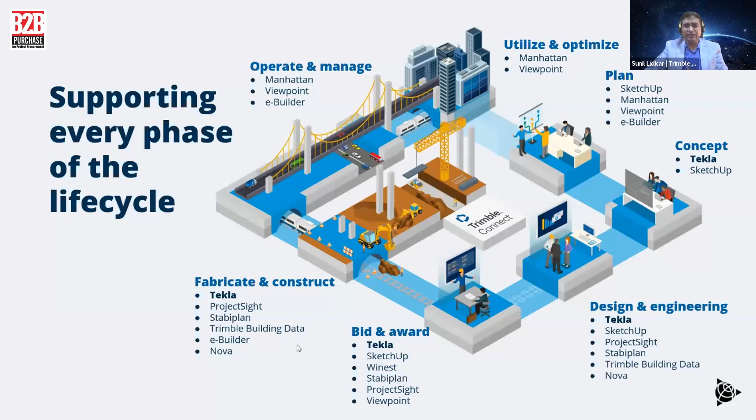And what we do: we are into operate and manage, utilize, plan, concept, design and engineering, bid, fabricate, and construct. So if you see, the role of Tekla starts from concept, design and engineering, bid and award, and fabricate and construct. So that's what we will be discussing.

So let's go through what we have in terms of Tekla solutions. For Tekla solutions, engineering divisions, engineering organizations like EPCs, pre-engineered metal building fabricators, or a fabricator like JSSL, are our customers. We do design analysis, concept design, and detailing. Construction companies are also one of our biggest customers. Likewise, the detailing and fabrication industry, which is more prevalent in India compared to other parts of the world - if you name the major projects in the world, I'm sure most of the detailing is done in India, engineering and detailing for sure. And to support this, we have a very good foothold in the education industry as well, because we need good manpower capable of delivering tomorrow's projects.

So we deliver truly constructible models, that is with LOD 450, which is level of development. So that model will carry more and more details, covering the whole structural workflow and structural BIM for all materials. So material and workflow is managed, and we have an open BIM approach.

Let's say, for example, if you want to collaborate with a third party BIM or 3D model, we can do it very easily. We have that capability to seamlessly adapt to various machinery, MEP, or any other 3D model. So before starting the fabrication or construction process, we are well aware if there are clashes, and we can take measures to avoid those clashes. We have the model, and we can take it to the field through AI, AR, and VR as well, because that's the upcoming trend we have seen in the industry, and collaborate efficiently with all of these without any data loss.

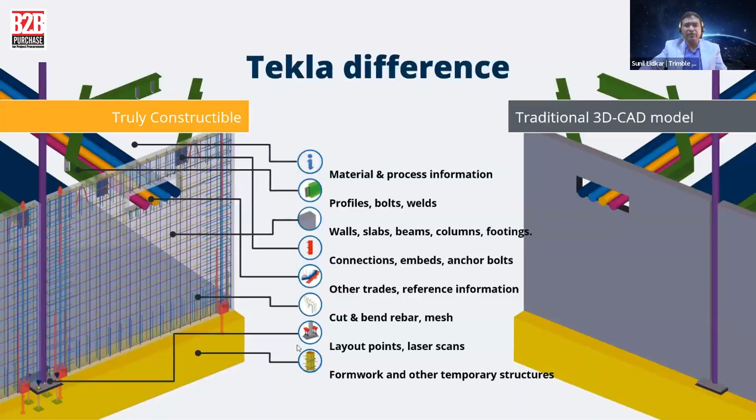We are talking about a BIM model. BIM is not just a model, not just a block which we are building, but a data rich model which carries all the information, materials, profiles, walls, connections, other trades. That is in collaboration with MEP or equipment. If we have rebars, layouts, and formwork, everything will carry into that model, and what we get is a truly constructible model. You can see these images.

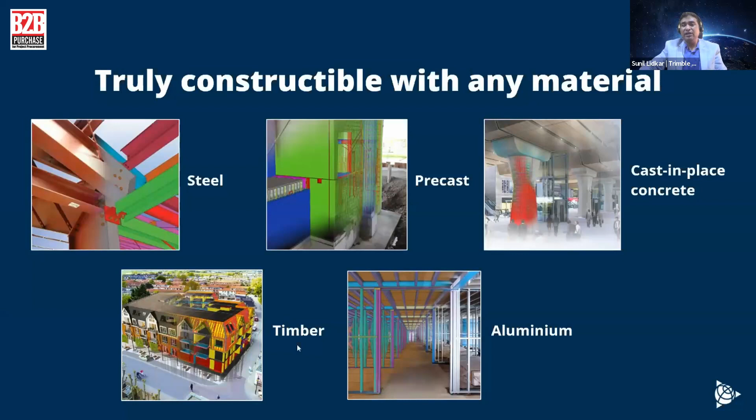This image is actually superimposed on site. So this is how your site will look once you deliver a model to a project through Tekla Structures. Whether it is steel, precast, cast in place, timber, or aluminum, we can deliver all projects with any material.

And what products do we have? We have Tekla Structures, a truly collaborative software known as Tekla Model Sharing. We have Tekla Structural Designer for design, Tekla Tedds for calculation and documentation, Tekla PowerFab for fabrication integration, and Trimble Connect, where we can actually take this model to owners and project stakeholders as well.

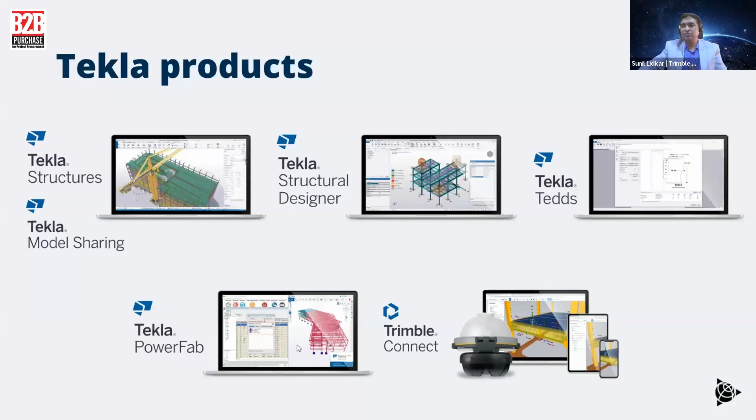So you will get real time information about the projects. We have Tekla Warehouse, something similar to an App Store, like what we have in iOS or Google. Tekla downloads, user assistance, and all those things.

So why are we very, very successful in the market? Because of our services. Our service is our backbone for our customers, because that keeps customers happy, and projects are delivered on time.

So Tekla Structures, as we've already seen, is an LOD 450 capable model, handling all materials and project types for every phase of the project, and it comes in 17 languages and 32 environments. So today or tomorrow, if you are delivering global projects, you need not worry. Your software is already capable of delivering those.

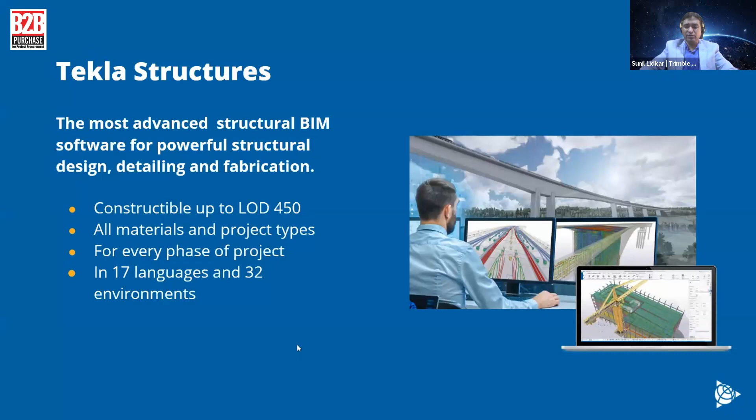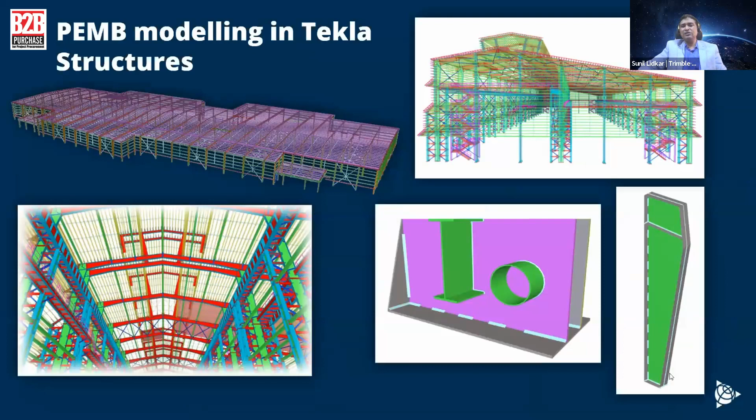So how are they delivering their projects? Because it's not just that you're building all the models at one go, but we have a data rich library. You just have to pick and drop. It's not that you're constructing all the lines, arcs, and circles. No, we are not doing lines and arcs and circles.

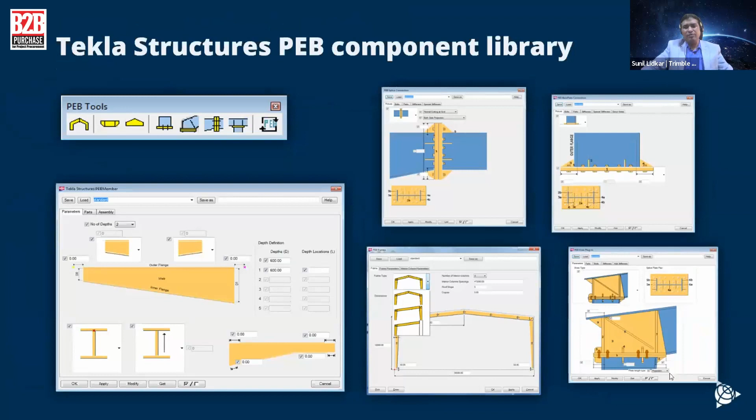We are actually working with columns, beams, stiffeners, nuts, bolts, and all those things, which is the engineering part used on a daily basis. Here you can see tapered sections, splice joints, various types of frames, knee joints, everything is automated. You just select what you need, pick, give the parameters, and drop into the model. That's how simple it is, and you can build your own connections without programming.

There are certain things which might not be there in the library. Most of the things are already there, but you can still definitely build your own connections as well. That's the beauty of the software, without any programming knowledge.

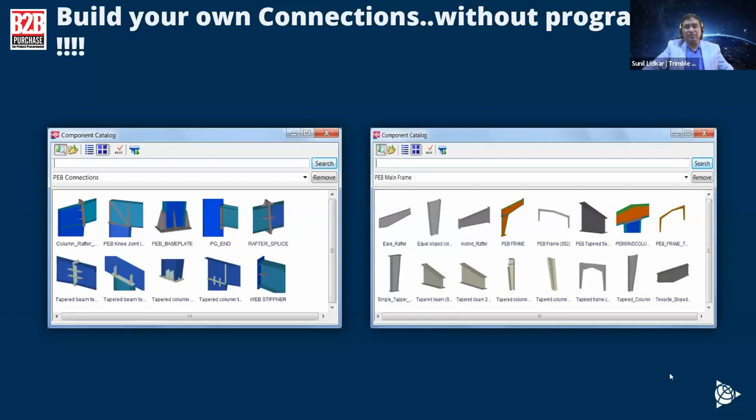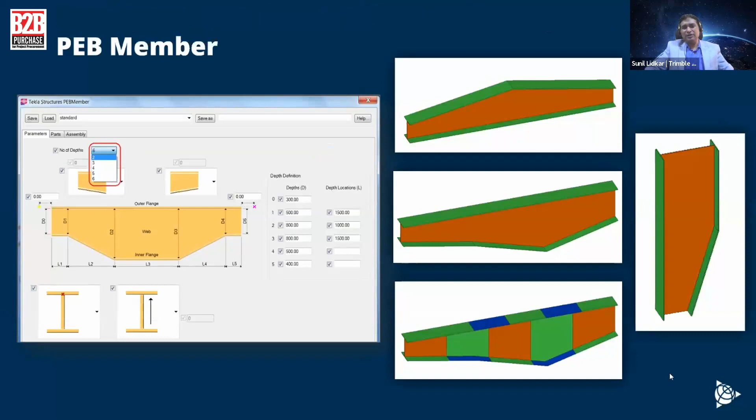So this is one example of a PEB member, where there are six depths, how you can do it, various combinations, how you can apply, and just drop into the model, and you can get benefit out of it.

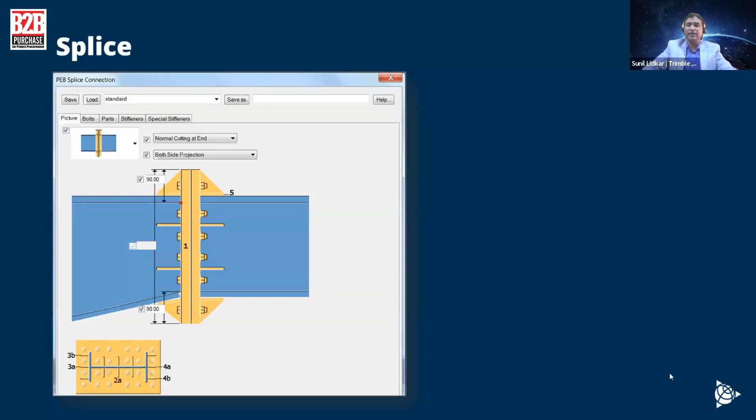If you have standard splice connections, key in your values, and save as an Excel file, say as XYZ1, once you load that XYZ1, all the parameters will be loaded automatically. This is applicable for all connections, not just splices, but every connection, whether it's a knee joint or any other connection. It's that simple.

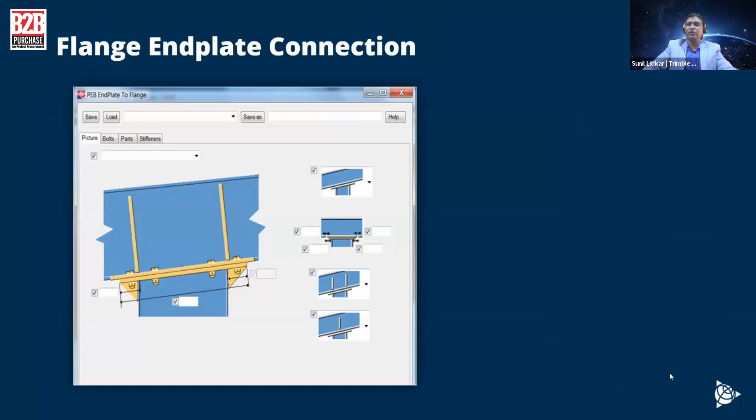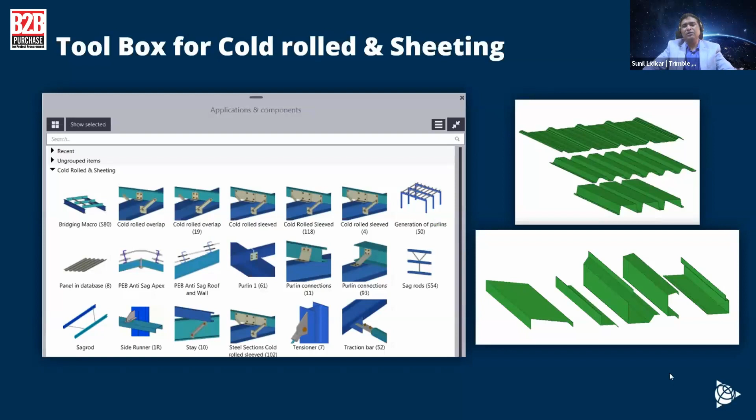So with ongoing projects, you are actually building your own library as per your company specifications. This is also the toolbox for cold rolled sections and sheeting as well. So if you want to do cold rolled sections with the software, it is already available within the software.

These are the purlin and runner slide for the secondary members. So you can definitely build these secondary members as well.

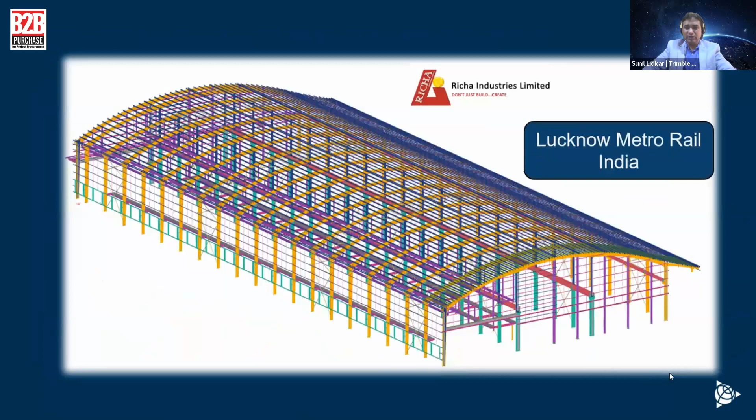And using this, these are some of the sample projects what industry has delivered successfully. So if you see this particular model by Richa, this model by Tata BlueScope Steel for GE India Industrial Shed.

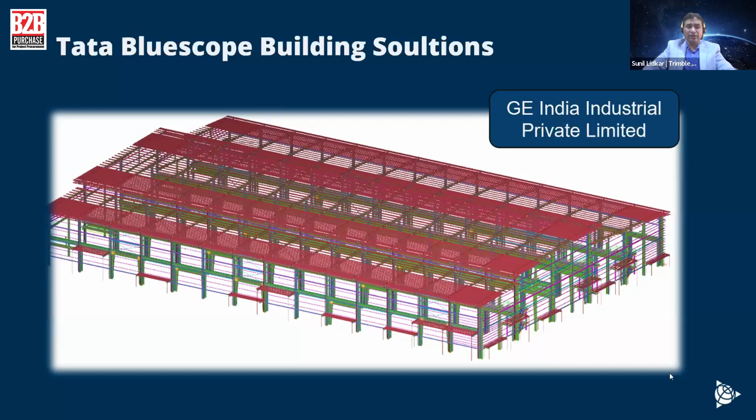This is as built, one to one. If there is zero error in this model, which you can definitely cross check, and it's without error, the site will replicate zero error. So there is on-time delivery of the project, benefit of cost, and saving of material as well, which is cost growing year over year, month over month.

This is what the building looks like, GE Industrial Shed. This is the internal part.

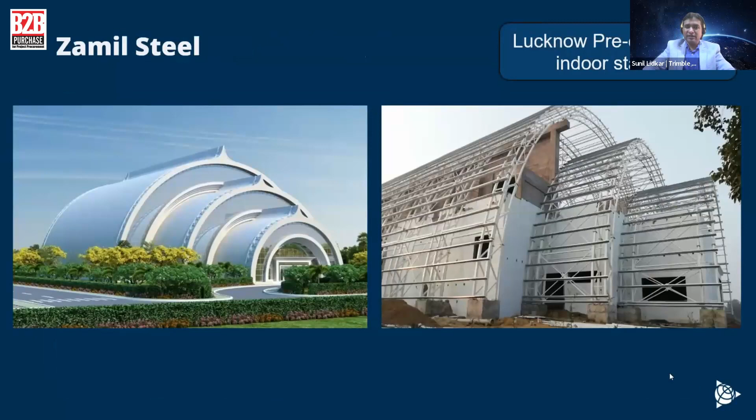This project is done by Zamil Steel for Lucknow Indoor Stadium. Look how complex the project is. It's an entire curvature project in the roofs, but it was easily delivered and on time.

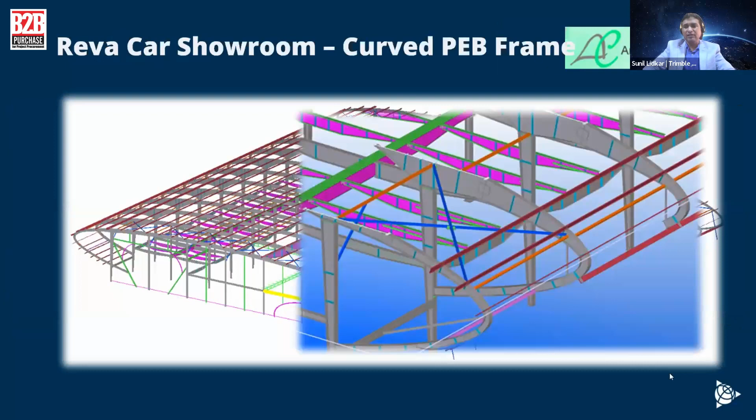If you see this Reva project as well, it's a curved PEB frame, which is very, very tough, and it was delivered for Ambient Controls Private Limited. See the complexity. These are the outputs from Reva Car Showroom.

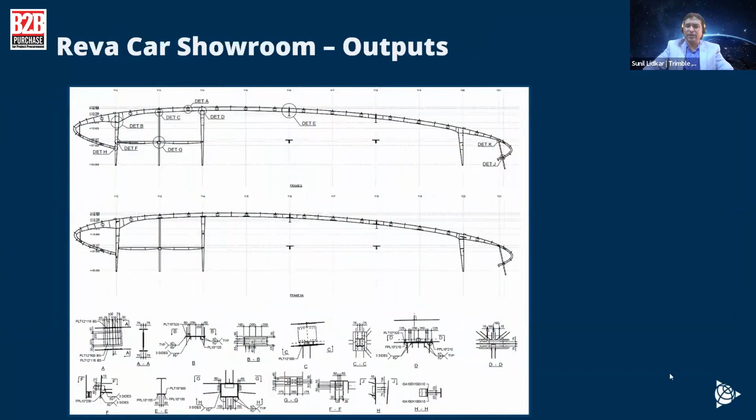We have taken this complex project to show you an output, and you don't have to draw this single part drawing, assembly drawing, or GA drawings. Everything is automated. You need not worry about this output of the project.

If you are sharing, let's say for example there are a number of PEB companies wherein their fabrication facility is somewhere in a remote part of India, and their design and detailing office might be in a city. So they can easily share between different teams flexibly, and it's a very low cost tool, very easy to share the model over the net, over the cloud.

And to further make the fabrication process very easy, we have Tekla PowerFab, which can manage the entire EPM process of a fabrication unit, that is estimation, production, management. Everything can be done. So once your model is detailed and fabrication drawings are ready, you can feed those fabrication drawings into Tekla PowerFab, and it can take care of your production, your estimation, your inventory.

Everything can be processed. If you have a nesting software, it can collaborate with the nesting software as well, so you can maximize your inventory. There will be less and less wastage in your inventory, and all the information will be real time.

That's the beauty of the product. You can do model visualization, estimate, manage projects, purchase as per the estimation and inventory. You can go for purchasing and do material optimization.

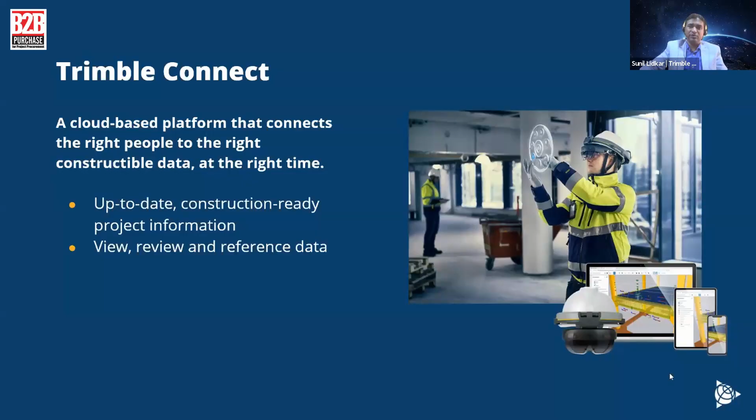So that's what we have. Overall, what we have seen today is how to manage your entire fabrication process in one easy to use software suite. You need not go for any third party or other software which cannot suit your existing detailing and fabrication environment. It's a single software suite.

Achieve better productivity, better decisions, and reduce errors. That's important, the productivity part and reduction of error, because it will save a lot of materials and cost associated with it.

Visualize, communicate, and share. Whatever information you have from design, detailing, fabrication, erection, you can share with everybody, in fact with your accounts as well as inventories. So you are not limited to delivering a single project.

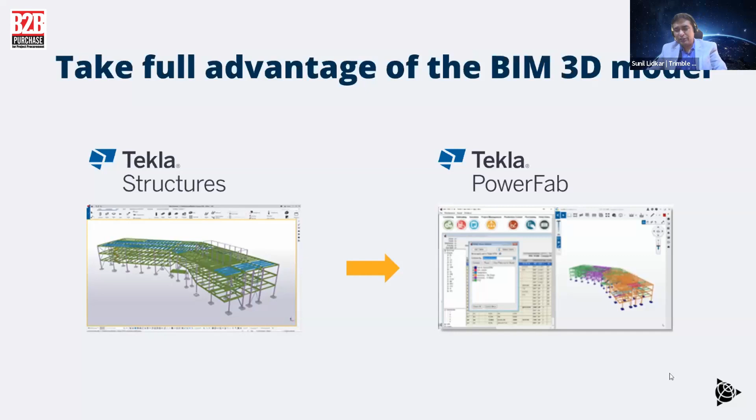The tool is so powerful that you can do multiple projects as well and integrate easily with industry leading software. That is one of the core strengths of the software, I can say. Take full advantage of the BIM 3D model, from Tekla Structures to Tekla PowerFab, that is from design, detailing to fabrication process, and then to erection as well, that is site management. So thank you.